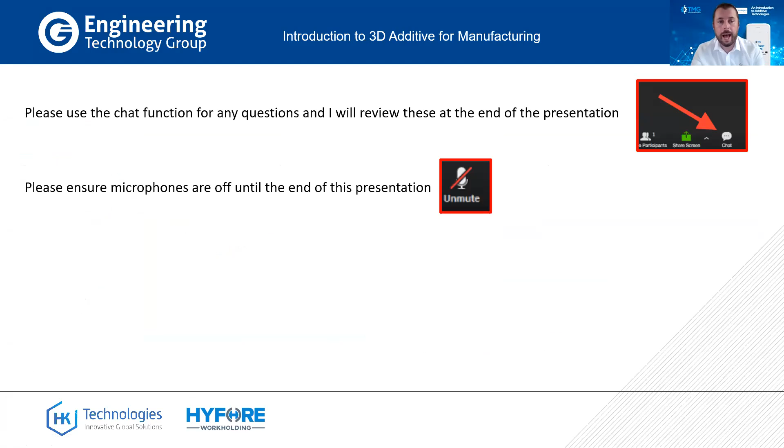So HK Technology was acquired by the Engineering Technology Group last year, obviously looking for a portfolio product to suit the engineering sector. Engineering Technology Group obviously pride themselves on being a full turnkey solution. So adding strength to the bow, so to speak, HK Technology was brought on board to bring in a portfolio product that wasn't part of the Engineering Technology Group. So obviously they focus on CNC milling and lathes, service and spares and training, obviously got a site over in Ireland as well. And then they've got the Hyfore work holding, which look after all the tooling and chucks, fixturing, etc.

So looking at the range, on the left-hand side, the ETG's machine tool range consists of a number of different principles with milling and turning. I look after the software side as well, which is in the top center there, work holding from Hyfore, and then we've got the specialist range through HK. Now I say specialist because within HK there are a number of specialists that work within the group. We've obviously got specialists looking after the wire EDM, so Mitsubishi Electric and OPS Ingersoll, specialists looking after the balance systems, and specialists looking after gear grinding and super micro finishing as well.

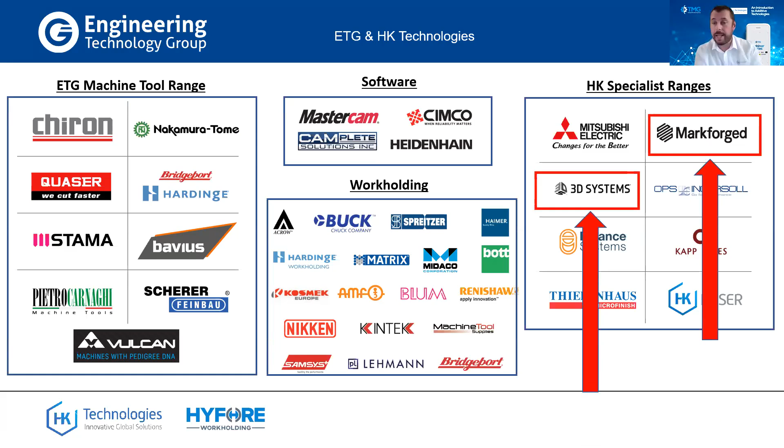What I'm going to talk to you today is about 3D systems and MarkForged and 3D additive in general. So what is it in a nutshell? Well, if you think about traditional manufacturing methods, injecting material into a preformed mold or removing material, 3D printing works in a different way. There are a number of different technologies for 3D printing, but they all consist in principle of doing the same thing - building layer upon layer, creating a solid from a 3D model. So it starts life as what a designer thinks of, he creates a 3D model, and then what he does, puts that into some software, layer by layer, builds that complex, detailed part. And what that means is there's no real additional tooling or fixtures that's needed, and very little treatments after as well. So it becomes a very slick process of manufacturing.

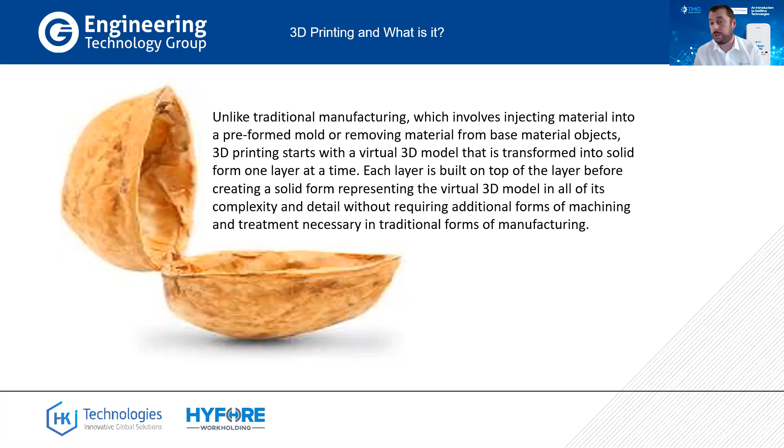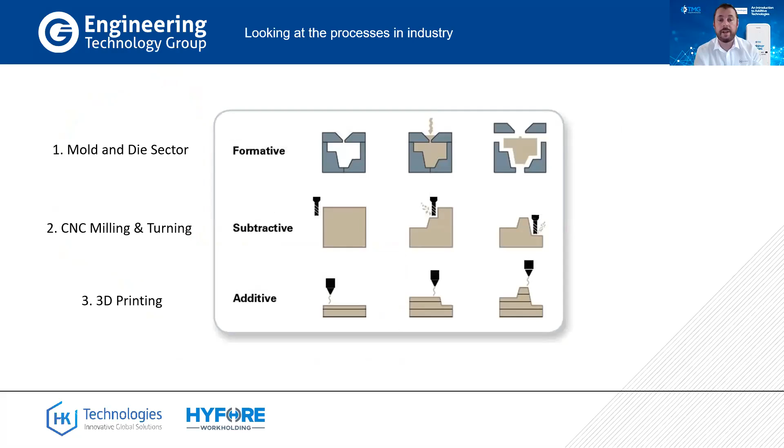So the processes within the industry, as I've talked about, there's the formative, which we class as mold and die sector, so injecting material into a preformed mold, CNC milling and turning, which is subtractive, and then we've got 3D printing as additive.

Within what ETG do, we've got the CNC milling and turning, where a blank piece of material is put in. It starts life as a 3D model, put through a CAD/CAM system which creates the tool path and outputs the NC code, the language to the machine. The machine interprets that and removes the material. You can see on those pictures how the subtractive machining goes.

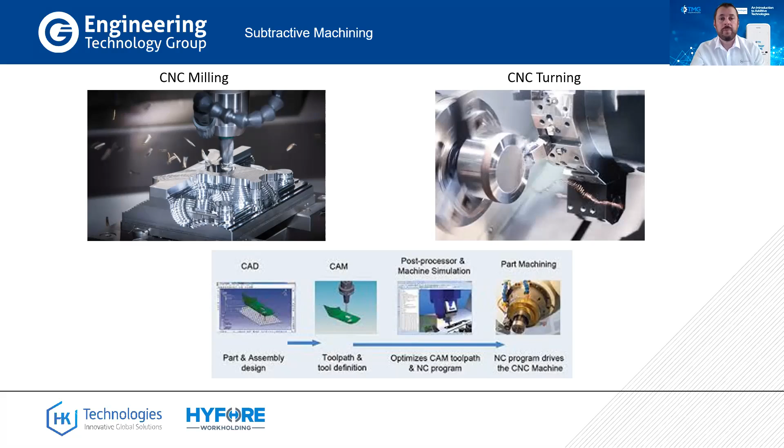On the injection or formative mold side, it's normally molten metal or plastics. You can see the complexity of what happens in your mold there. There's a lot of complexity, and quite often CNC milling or lathes are used to create these because they're quite complex pieces.

You'll notice, for example, on the left-hand side, the plastic side, it's a raw plastic that's heated, then pushed through, but there's a lot that goes on in the mold and core cavity. You can see a number of components that need to come together to create that part. It's forced through, so you're reliant on the mold and cavity being correctly machined to give you the part.

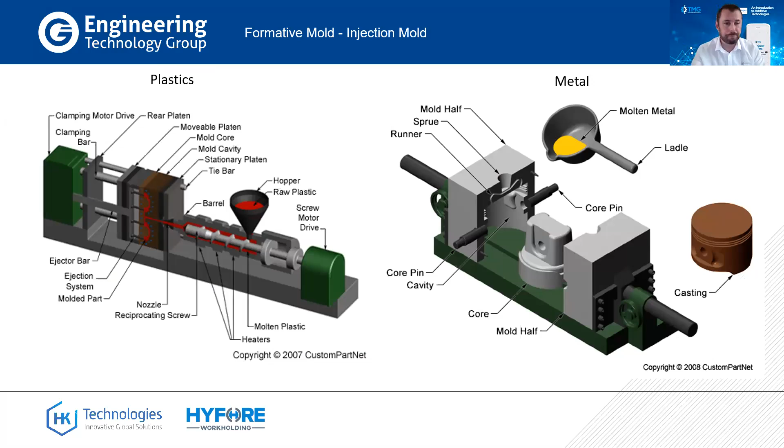3D additive is a different principle. It starts life as a 3D CAD model, with the designer having an idea in mind and creating the model. He then outputs to a file format, one that's accessible to the software we use for 3D additive printing, namely a slicing software.

Once they've got the model, they put it into the slicing software, which tells you where you want the part to sit on the printer, how you want to align it, how you want to rotate it, what material you want to use, and what layer consistency you want, whether you want a good resolution or slightly higher resolution. It's a really slick process, normally just a few clicks to get to where you are.

What you'll notice is there's no additional fixturing or tooling needed to hold the part down. Once you've done that, you move to step 4, the slicing of the layers. The software will divide and print each layer, working out the printing of the layers, whether it's infusing it with various materials, and it takes care of all of that process.

From there, you're literally sending it to the printer. Once it's sent, away it will go, and it will produce, finally, step number 6, the 3D printed object.

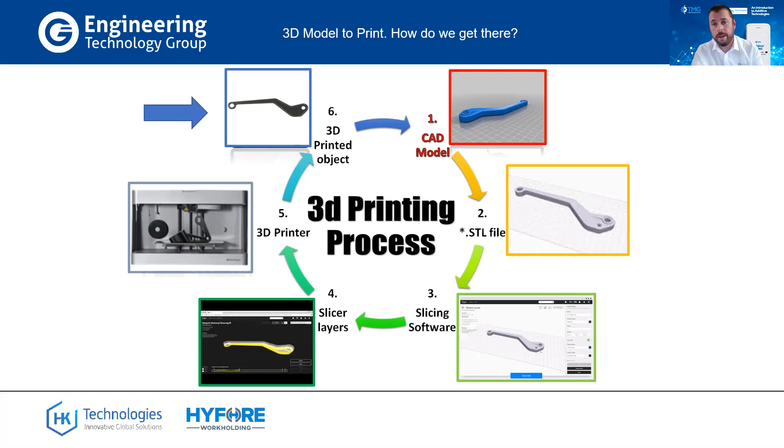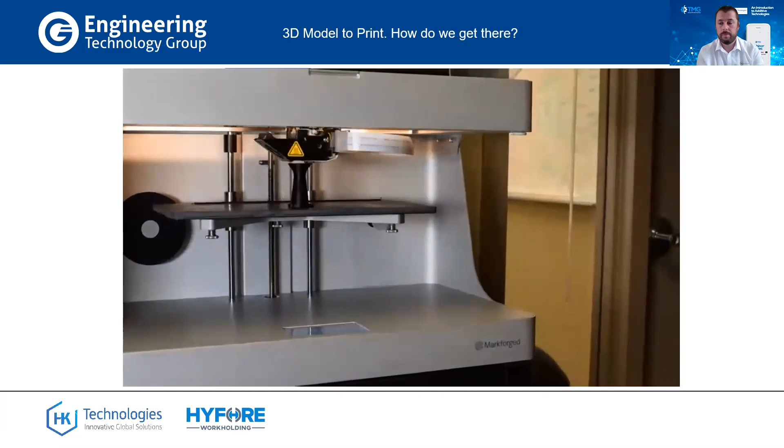Okay, so hopefully that just shows you how simple and straightforward it is.

Just to highlight some of the product range from HK, we've got, as alluded to earlier, the Markforged range. The technology used is fused filament fabrication, sometimes known as fused deposition modeling, FDM. There's the range of printers we've got - 3 on the desktop and 3 on the industrial range. The technology heats the nozzle up, and the material is extruded through the nozzle.

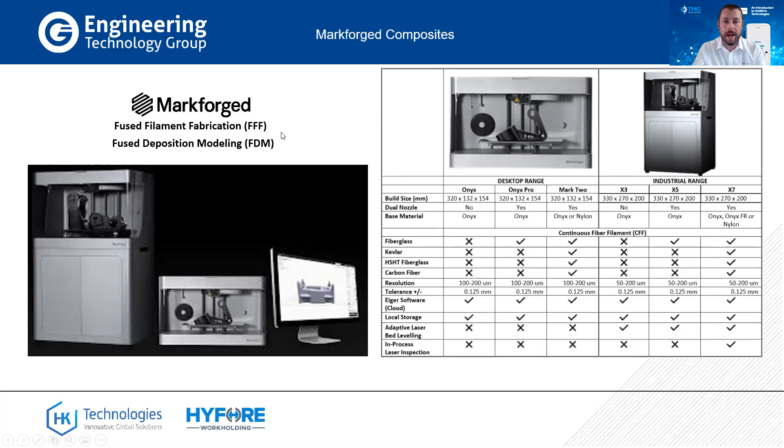We talk about composites, being 2 or more materials brought together. What Markforged do best is that we always start with a base or matrix material, which is the core of the part.

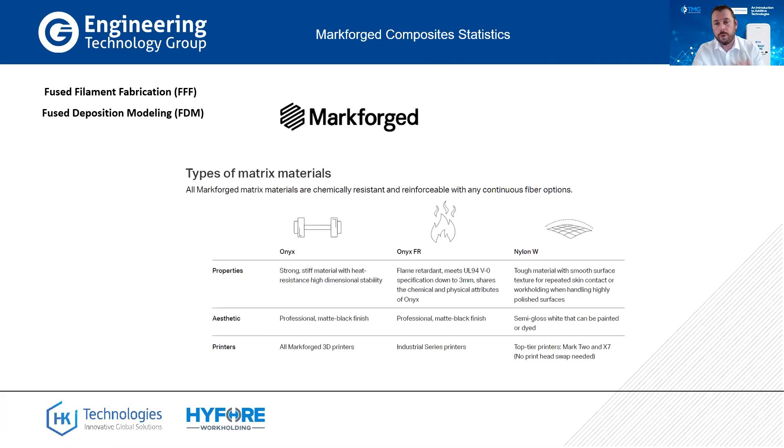Generally an Onyx or an Onyx FR, there are different characteristics and properties within that, and they are the basis of that part. But the beauty about the Markforged printers is that you can bring in reinforcement, chemically resistant and reinforceable materials. With that, you've got continuous fibers that can be put within these materials as well. We've got carbon fiber, fiberglass, and Kevlar in there. They've all got their own properties, such as whether the part's under tension or bending, for various different aspects of various different industries.

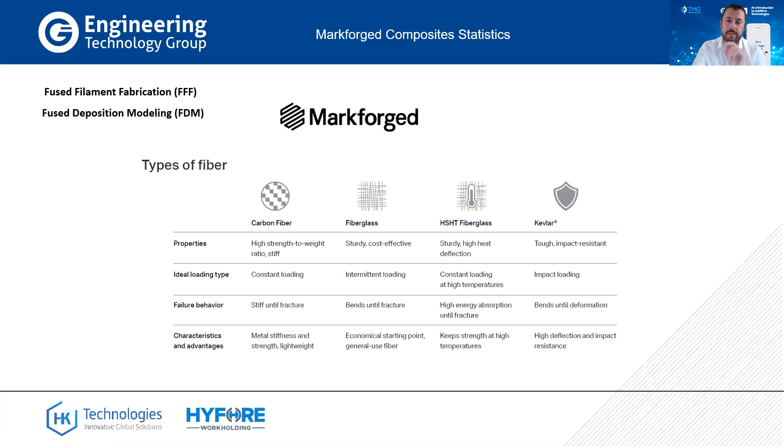But the beauty about these printers is that they produce workable, usable parts within industry. Quite often the concept is that 3D printing is for prototypes only, for creating things - not with the Markforged, it serves a purpose. The reason to say that is when you look at statistics - when you're infusing that with carbon fiber or high strength, high temperature fiberglass, it actually proves to be stronger than aluminium. So it's a really good talking point for us when we're talking about 3D additive, that it's a real game changer and a real player when it comes to going up against parts produced out of aluminium.

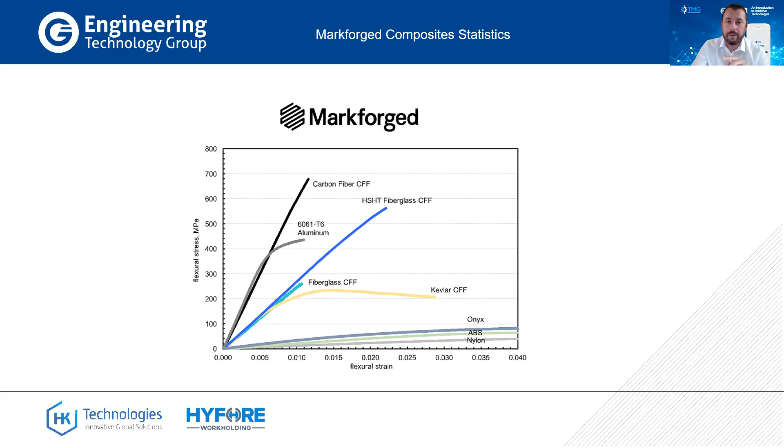Just to highlight that, there's a short video I'm going to show you, and this is a part done out of Onyx reinforced with carbon fiber, and it's put under extreme stress.

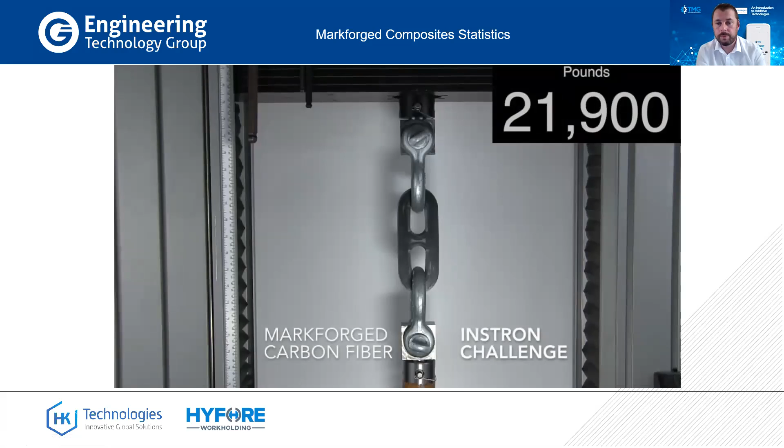So obviously the part did go, they took it to breaking point, but 22,000 pounds is about 10 tons of pressure on that part. You can just see, by putting that continuous fiber in there, how much strength that adds to that part.

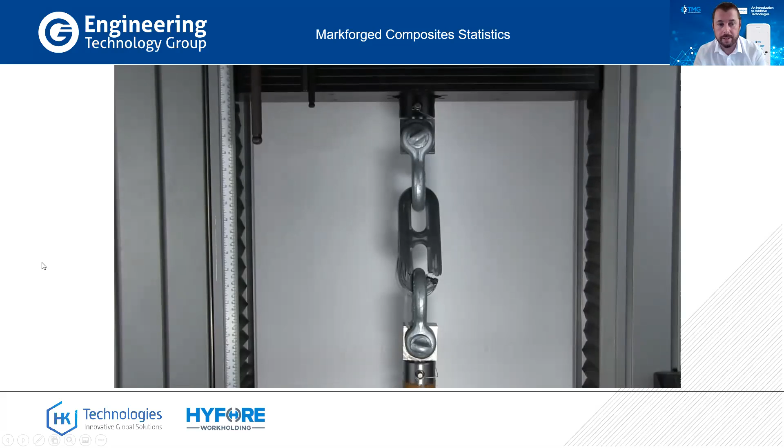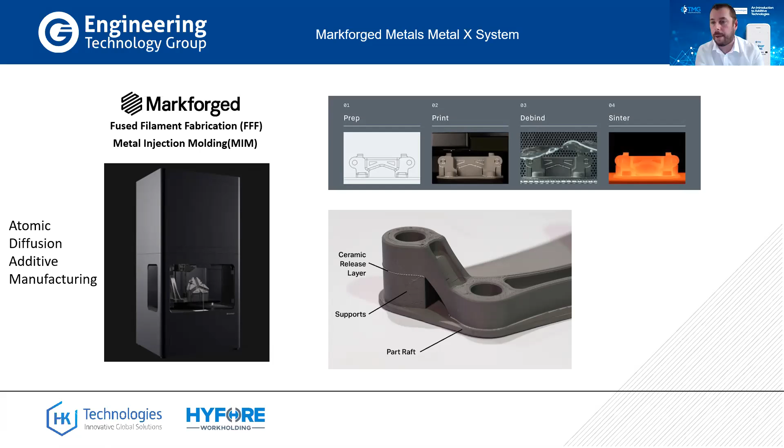It always builds a base plate for the component to go on, and then it puts any supports that are required in there with a small layer of ceramic release. The reason why it does that is it makes it easy to break away the part at the end of the process, for getting away the supports and the part raft, so you're getting the complete component off. Generally, you can just tap it away from those once it's completed.

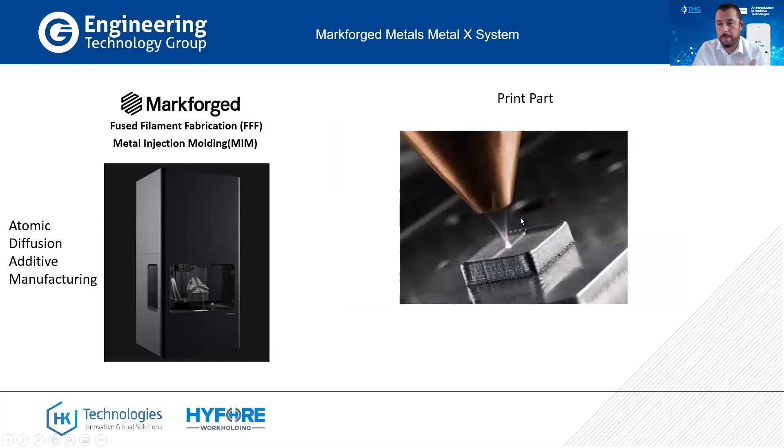Similar process, same software used at the start to prep the model, and printing the part is a very similar concept. So you print the part, but what you need with the metal part is you need to debind the part. When it comes off, we class it as a green state, and you have to debind it - it goes through a washing system to do that, and then it goes into what we class as the brown state. Then it goes into a sinter. What the sinter does, as the final process, is it takes it up more or less to the melting point of that material to remove everything else barring the core of the material. And what you get off there is the finished part out of metal.

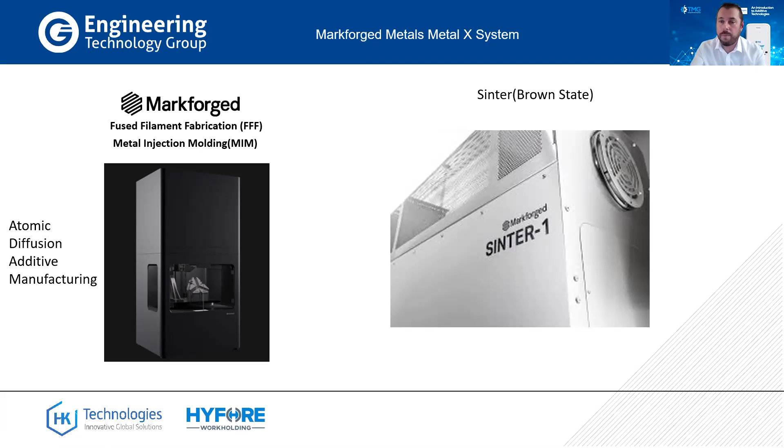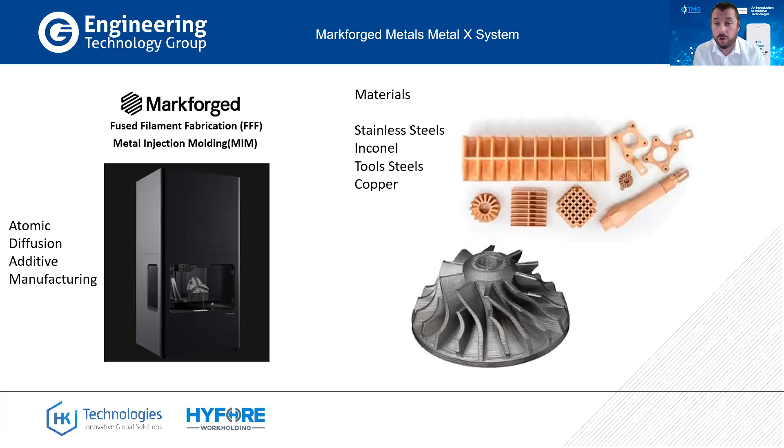The materials that we've currently got with this are stainless steels, Inconel, tool steels, and copper. There's a good range of materials for the engineering industry, so it makes them look at what other concepts can be used to manufacture these parts.

Moving on then from the Markforged to the 3D Systems side, I've talked about subtractive machining and injection molding. Now, the technology moving on and the way 3D printing's gone for injection molding for scalable solutions, we've got the Figure 4 system. This is what we're trying to look at and pitch to the right people - that this could be the new technology solution for injection molding.

You thought about earlier with the sides and the molds that are needed in order to inject the plastic, the amount of work that's carried out within those parts. With 3D printing, again, it's a case of using the software, bringing in the parts, adding in a number of parts - no tooling, no fixtures required, just some support structures, which the 3D printer will provide as well. So this short video will just give you an idea of how the Figure 4 works.

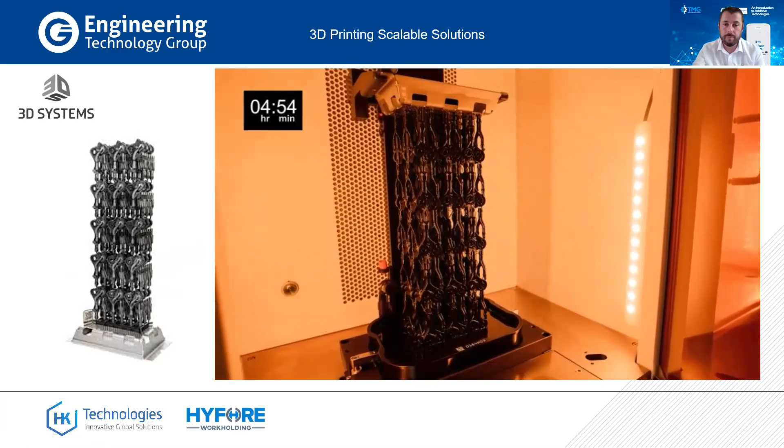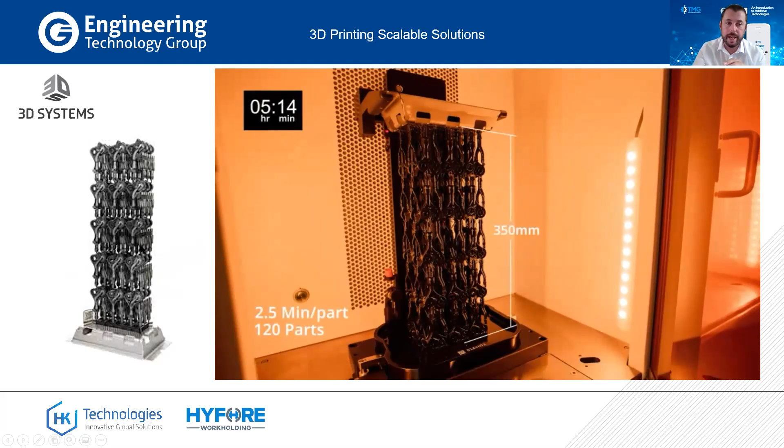So what you'll see there is around 120 parts done within five hours. Yeah, some people would say injection molding can produce the parts, but what you can do with these is it's a scalable solution. With the standalone, which this was produced on, you'd be looking at about 500 parts a month. You can go up to a modular system, incorporating a number of these units, up to about 10,000 parts per month.

And then there is a full production system, which includes washing units and UV curing units within the system as well. We're looking at about 80,000 parts per month, so we're looking at around 1 million parts per year.

So what's interesting, on the right hand side, is the difference between what we class as Fig 4 against injection molding. You're looking at much less design time there. There's no tooling design, as we talked about earlier, where you need the tool to be created in order to form the plastic, the mold, etc. And it just reduces costs, also for small batch runs for prototypes and that sort of thing.

It becomes a very, very easy solution for the customer to use, in terms of not having to create heavy, big mold tools and wait a number of weeks for those to be manufactured.

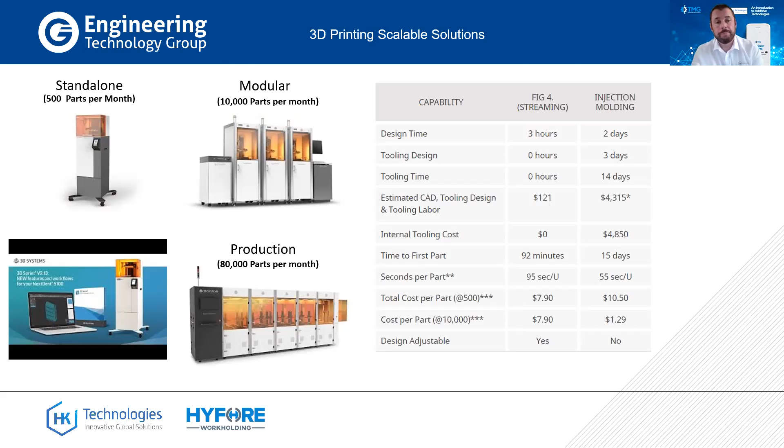So the applications and sectors - we looked at some of the printers earlier, and part of the Engineering Technology Group philosophy is CNC milling and CNC lathes. We can aid there, because quite often a machine tool will have to manufacture the next op jaws, op 2, op 3, if it's holding a complex part. Well, why not use a 3D printer for that?

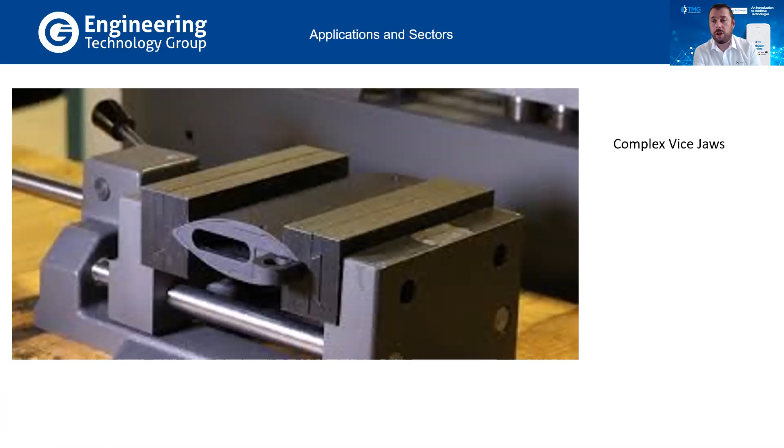You can produce these complex jaws. Once they're modeled, you output them, you print them. It becomes a very easy solution. It's not using the machine, so there's no downtime for the machine to be producing these fixtures. It can coincide with that, so it aids their manufacturing.

It can be used for fixtures, so maybe CMM - not just jaws, it can be used for fixtures as well. Remember, you can put continuous fibers in these, making them extremely strong and durable.

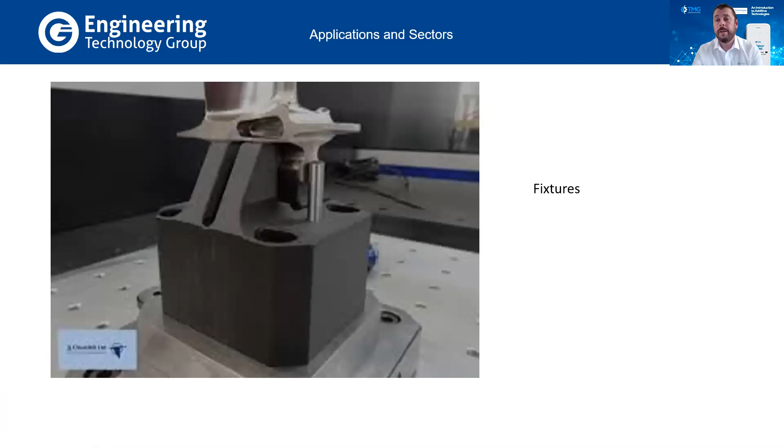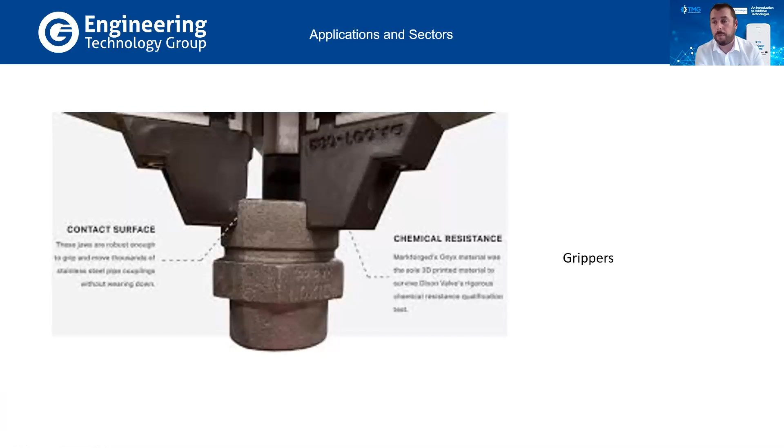Grippers, so robotics can have these. Quite often these grippers can be quite big sets of jaws, so producing these out of these composites can make them much more lightweight, and the actual strength properties give fantastic gains as well.

Prototypes, well, that sort of speaks for itself. If you imagine trying to do a prototype and having to create fixtures and tooling around it, then the designer decides to change his mind - Formula One is one of those industries where it's constantly evolving and changing. The idea of being able to just change a model and output it to print makes that process so much easier. And with reinforcement materials as well, you're getting the lightweight structures, the strength and everything - it's becoming a big buzzword.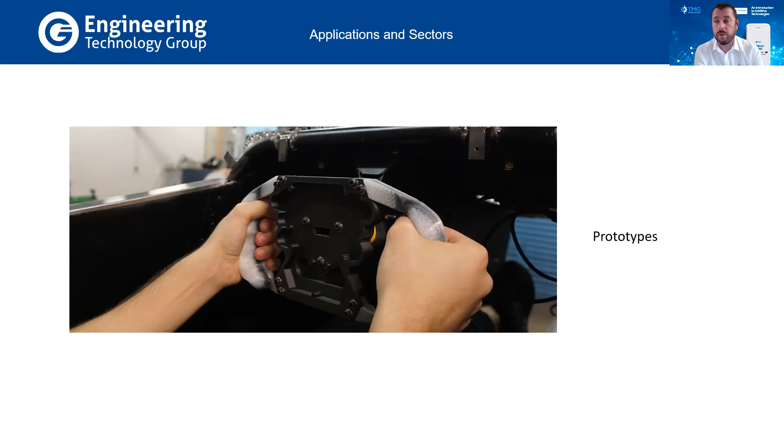So the application sectors - this is just a small few really, dipping the toe in the water, but they are making waves against aerospace, looking at where we can fit in there.

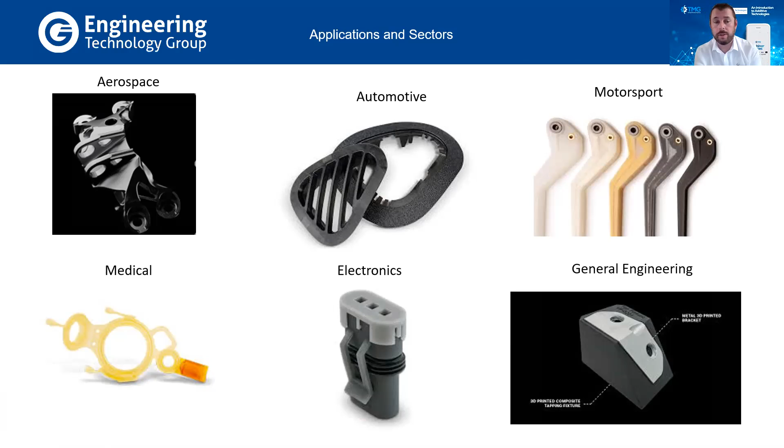Electronics industry, and again the medical industry as well. We've got materials now within the Figure 4 that are becoming sort of medical use for medical purposes as well. So we're making waves along there.

So just to summarise then, the software is very easy to use, whether it be the Eiger or the 3D Sprint between the two, Markforged and 3D Systems. Very easy to set up, very easy to bring your part in and output. There's no additional setup required.

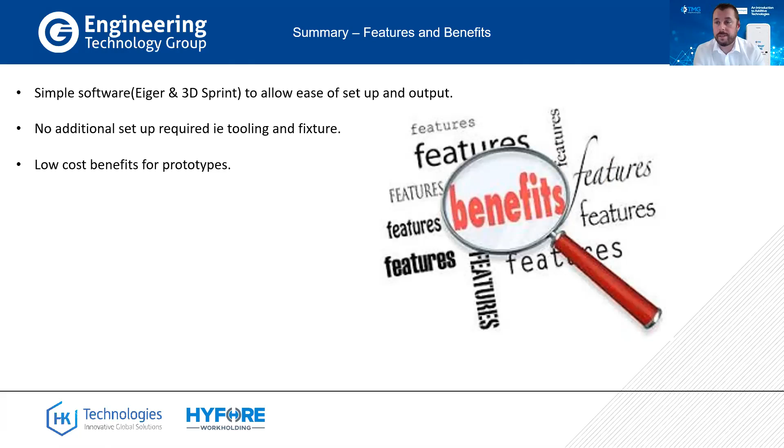The tooling and the fixtures, well, they're non-existent really when it comes to 3D printing. There's nothing to do apart from put the model in and output it to the printer. The benefit for prototypes, as I said earlier, speaks for itself. Able to change the design and re-prototype, just printing out, just saves time and money all around.

The strong, lightweight and durable workable parts. So as I said to you, more lightweight on the Markforged with composites, stronger than aluminium, and very durable as well. Reduce the downtime with CNC.

We're obviously wanting to work with Engineering Technology Group. They sell machines. We want to help provide them with the technology to 3D print. Help aid those guys producing fixtures and jaws as well. So coinciding with that.

The printers are very quality and the robust construction as well. But the speed to produce the parts, as I say, 3D model to print, the advantages there are just second to none really, and the flexibility also as well.

So it gives the designers much more flexibility really to go and change prototypes without feeling a big design change is going to cause a massive amount of cost to their business. And they do give excellent repeatability, and the amount of different materials through Markforged and 3D Systems is superior as well. We have just a wide variety of materials that can be used within all industries.

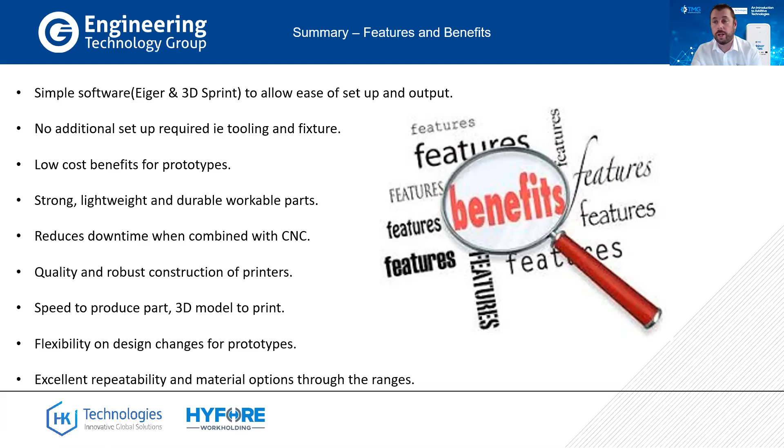So that's pretty much me. I hope I'm not taking on too much, but just a flavour really of 3D additive against the other formative and subtractive, and what it can do. Thanks very much. So I'll happily take any questions.